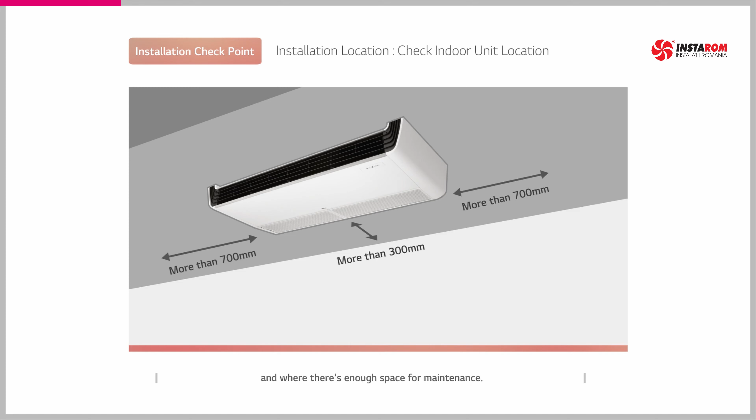Install the indoor unit at a well-drained place where it can be easily connected to the pipe, where no obstacle disturbs indoor air suction near the suction nozzle, and where there's enough space for maintenance. Choose a place away from the kitchen and ventilation fan, or near the access door,

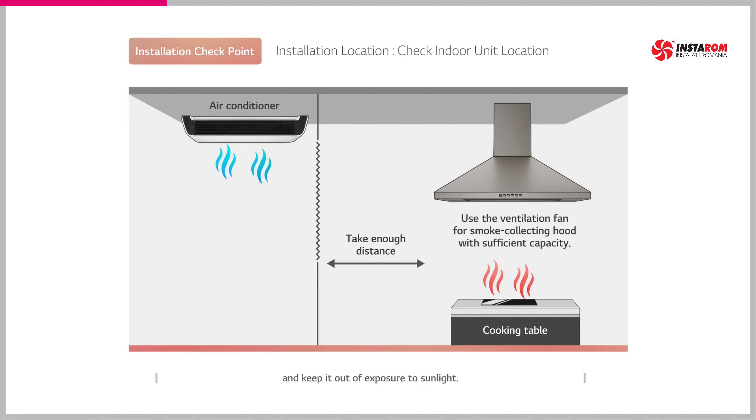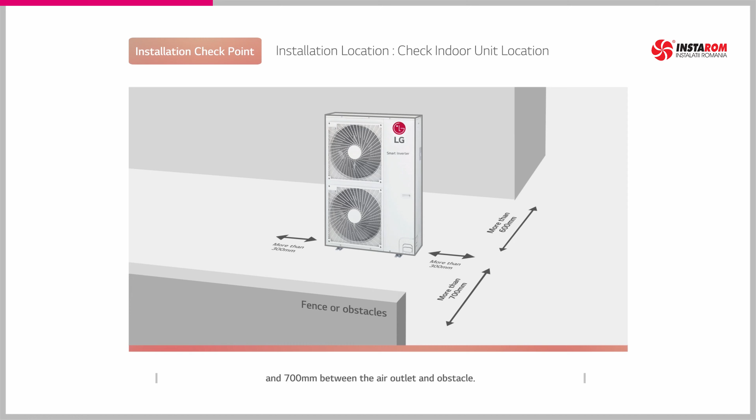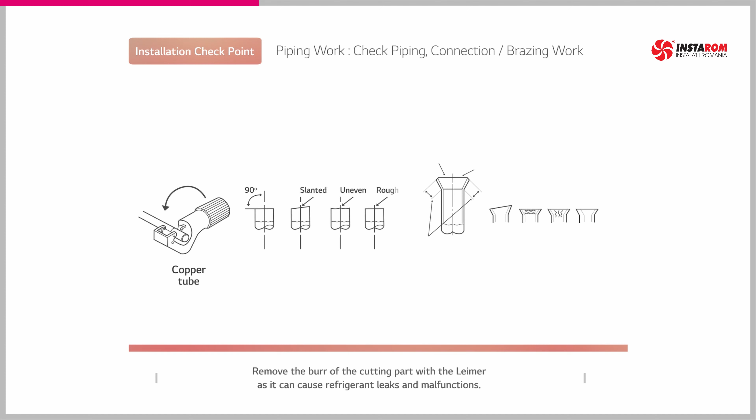and keep it out of exposure to sunlight. Keep a distance of at least 300 millimeters between the air suction nozzle of the outdoor unit and wall, and 700 millimeters between the air outlet and obstacle. Make sure to cut the pipe in a straight line. Remove the burr of the cutting part with the reamer, as it can cause refrigerant leaks and malfunctions.

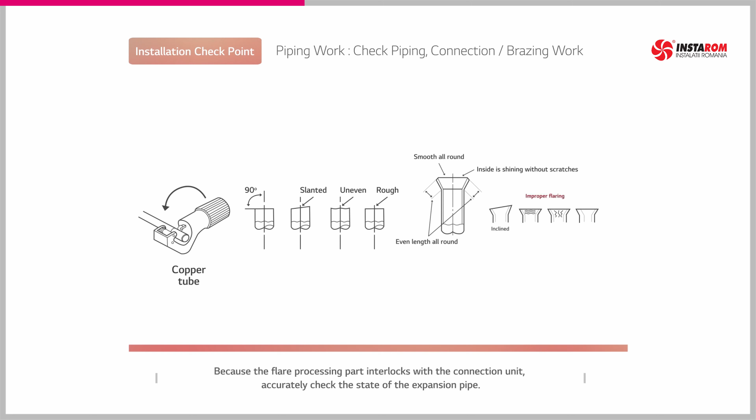Because the flare processing part interlocks with the connection unit, accurately check the state of the expansion pipe. Conduct flare work and use the torque wrench based on the standard when connecting the pipes of the indoor and outdoor units. Replace air inside the pipe with nitrogen before brazing. Nitrogen pressure of below 0.02 megapascal, 0.2 kgf per square centimeter, should be used.

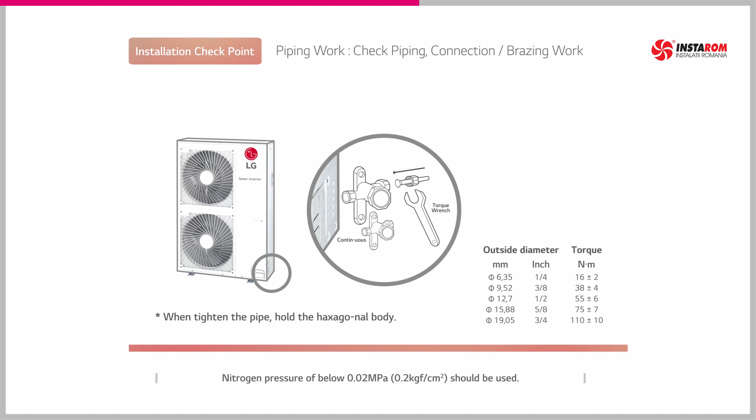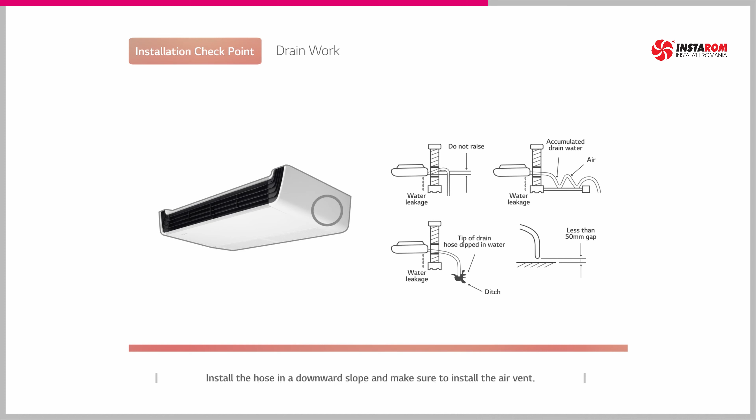Push and fit the drainage hose into the drainage pipe of the indoor unit and connect and apply bond to the clamp so that no water leak occurs at the connection part. Install the hose in a downward slope and make sure to install the air vent.

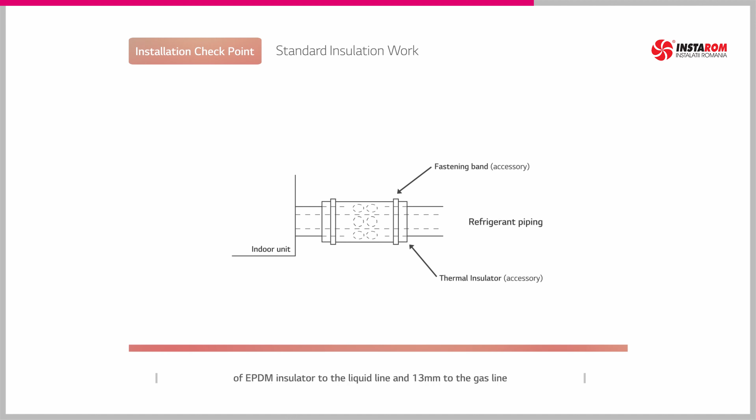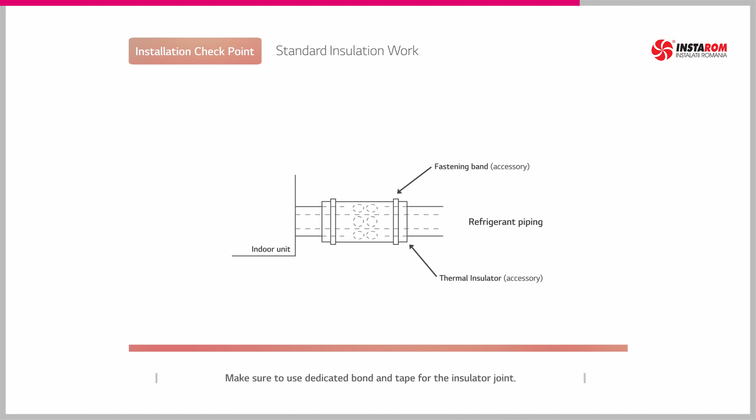When using a refrigerant piping insulator, apply at least 9 mm of EPDM insulator to the liquid line and 13 mm to the gas line by referring to the standard thickness table. Make sure to use dedicated bond and tape for the insulator joint.

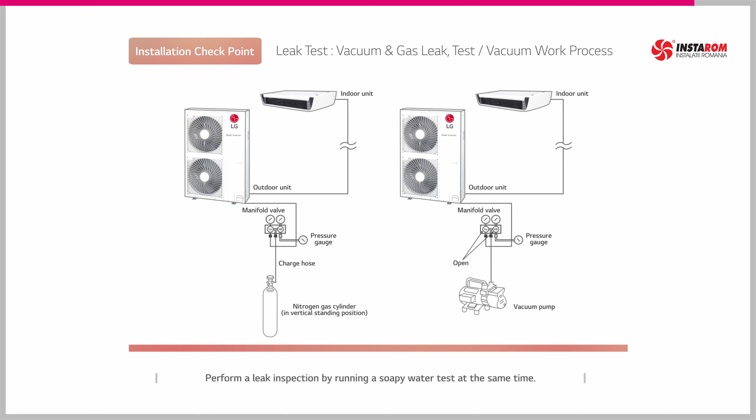Be sure to use a vacuum pump and nitrogen gas when checking for leaks and purging air. Pressurize nitrogen gas up to 3.8 megapascal using an R410A dedicated manifold gauge, and check if pressure is maintained for 24 hours. Perform a leak inspection by running a soapy water test at the same time.

Trial operation will start if the set button is pressed after pressing the function setting button on the wired remote control for more than 3 seconds.